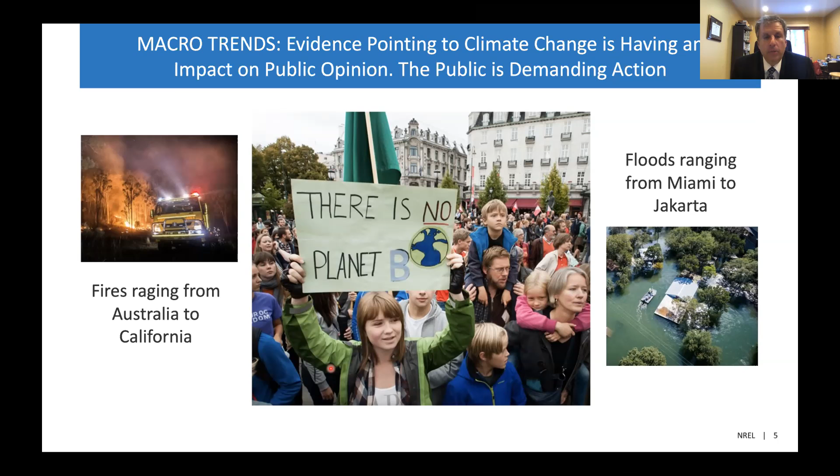More extreme weather events. As we all know, you can't tie a specific weather event to climate change. But what you can see is more extreme conditions, and we're clearly seeing the negative global impacts of that. So there really is an imperative to do something about climate change.

This one is kind of a more recent problem, if you will, but in a lot of ways, every bit as big of a problem. Single-use plastics are becoming the bane of society. The recycle rate is quite low. They're disposed of very casually. They end up in oceans, plastic tides, degrading pristine beach environments, ocean environments, mountain environments, you name it. So really, single-use plastics are becoming a very societal problem, both in the United States and globally. And it's really imperative of science and engineering to do something about that.

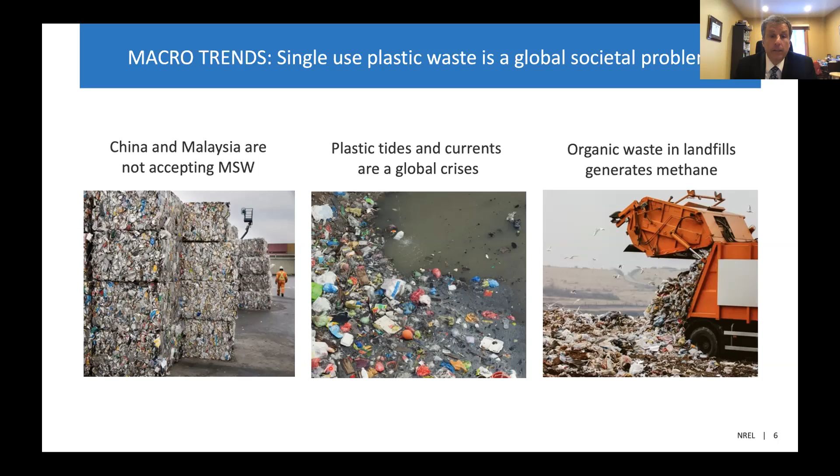And then finally, and in a lot of ways, most importantly, conventional internal combustion cars have major detrimental impacts on air quality. It's affecting the health of our population. Probably most importantly, it's affecting the health of our children. Air pollution, urban air pollution, is a significant issue. It's a global health issue. And there's a lot of contributors to air pollution, but vehicles, conventional vehicles, are a significant contributor to that.

So that's really kind of the situation that we are in. Society as a whole has really benefited from the extensive use of fossil fuels for electricity generation and fuel generation, but our commodity-based, low-priced energy with almost exclusive reliance on fossil fuels is having many detrimental impacts on human health, planet health, and it's really at the imperative of engineers and scientists to address that.

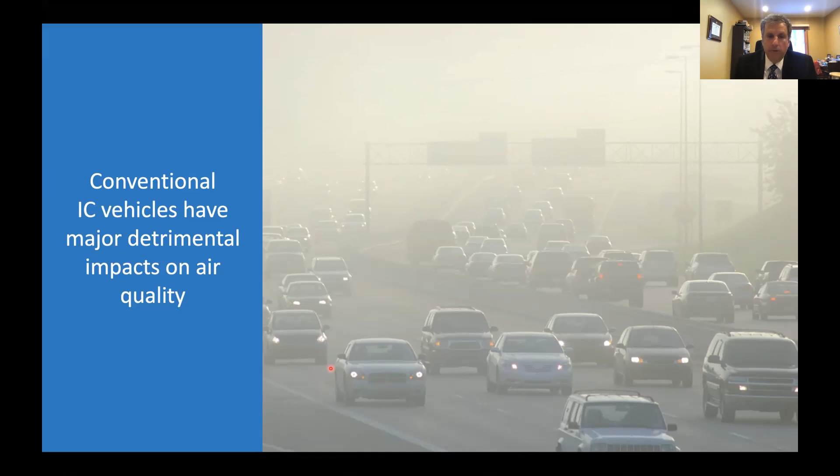So now I'm going to kind of switch gears. That was all kind of, I don't want to say doom and gloom, but that was really kind of highlighting the detriments of our current approach. So I really wanted to switch gears and focus on some positive developments. So I'm sure everybody in the call has heard about the promise. A lot of people are probably working in this field. The promise of low-cost batteries, high-capacity batteries, and how that can really enable a transition to battery electric vehicles.

Interestingly enough, a metric was set up probably in the early 2000s that once we achieved a battery cost of $100 per kilowatt hour, scientific wisdom, commercialization wisdom, is that would be when battery electric vehicles were truly competitive with internal combustion cars, gasoline powered cars, and they would have significant penetration of the marketplace to a point of being the majority of new vehicle sales. So you can see this chart in the middle really plots that, and you can see the dramatic reductions in 2010 to 2018.

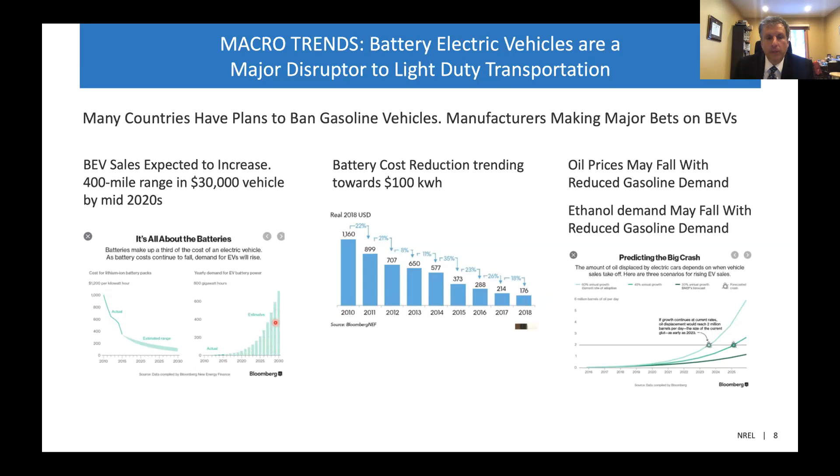The reason this chart stops at 2018 is that it was when the data stopped being reported publicly. Now individual companies like Tesla, General Motors, BMW, a lot of vehicle manufacturers now consider that a proprietary technology. So it's not peer-reviewed published what battery costs are, but a lot of true experts in the field feel that industry leaders like Tesla and General Motors already have crossed that $100 a kilowatt hour threshold for battery cost. And then as you can see from this chart, that's when it's really expected that electric vehicles will really start taking off into the marketplace.

So that's encouraging. I did get some data from, there's a lot of organizations out there that predict the future. As we all know, nobody has the ability to predict the future. It's impossible. But what you can do is look at trends, do various different assumptions. This chart here, in a lot of ways, to me, proves the obvious, since this is put out by the Energy Information Administration, a part of Department of Energy, so it's somewhat politically influenced in the fact that they take very conservative assumptions. And this shows the conservative nature of their assumptions.

What this slide projects is vehicle sales as a function of the range of the electric vehicle. So what they're showing is if the electric vehicles only have a 100-mile range, essentially sales are negligible. And then once you get to 200, 300 mile range vehicles, sales dramatically increase. Interestingly, it doesn't show much of a market for plug-in hybrids. A lot of people would argue, probably correctly, that this is overly conservative, as the vehicles commercially available are already over 200-mile ranges. Some are more than 300-mile range. So realistically, this chart would probably be more meaningful if it took it up to 400 or 500.

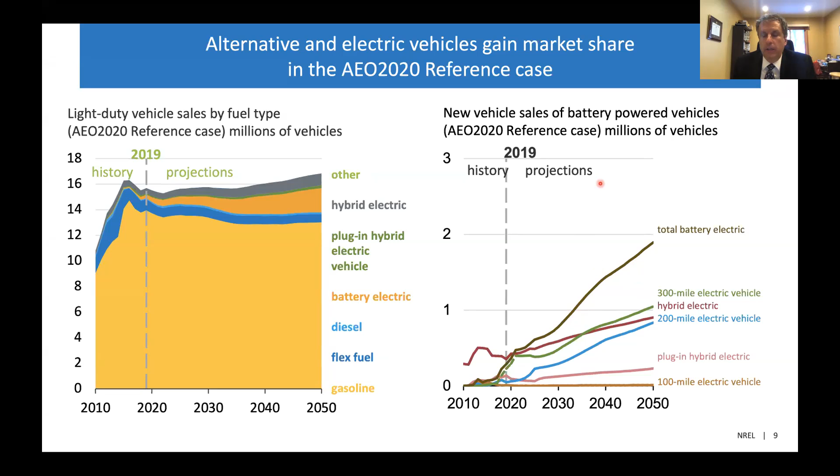But what you can see is that seems to be the driver for consumer acceptance. So once we get these higher range vehicles, you'll really see a dramatic increase in electric percent. This is all light duty vehicles, cars, light duty trucks. So that would really be the predominance of new vehicle sales. This is also very encouraging.

This shows the history of electricity prices in the United States and in various different scenarios. These are all extremely encouraging. And you see by the predominance of low cost wind and solar that electricity prices are going down. Like I mentioned, I would take the specific numbers with a grain of salt, but I think the overall trends are extremely encouraging. You see electricity prices going down, plus you see low carbon sustainable percentages taking over the mix of the electricity. So that's just very encouraging.

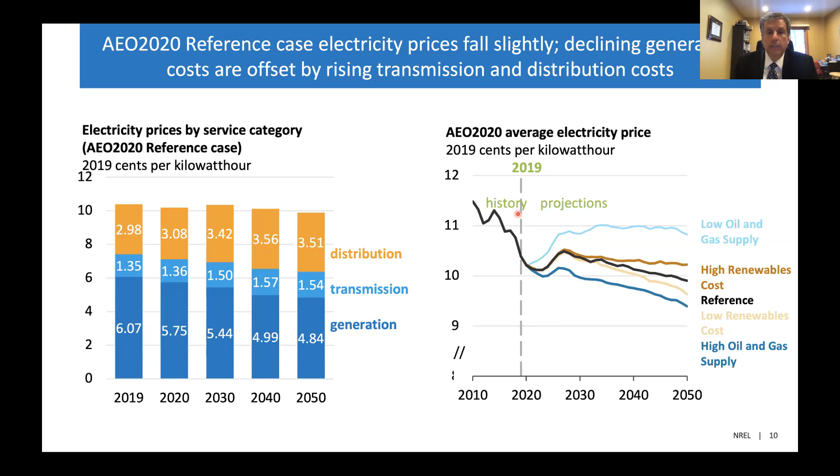First time really in, I can't think when, maybe in the 1960s, but even before that, that the long-term projections are electricity prices decreasing and also switching to more sustainable, lower polluting, lower greenhouse gas emitting. So that's very exciting. This just shows it for biofuels.

Again, biofuels have come down to the point that, maybe not now with the low crude oil prices due to COVID-19 restrictions and driving, but prior to the COVID reduced use of transportation fuels, biofuels are arguably competitive. And this isn't first generation biofuels. This is the more sustainable cellulosic, lignocellulosic biofuels.

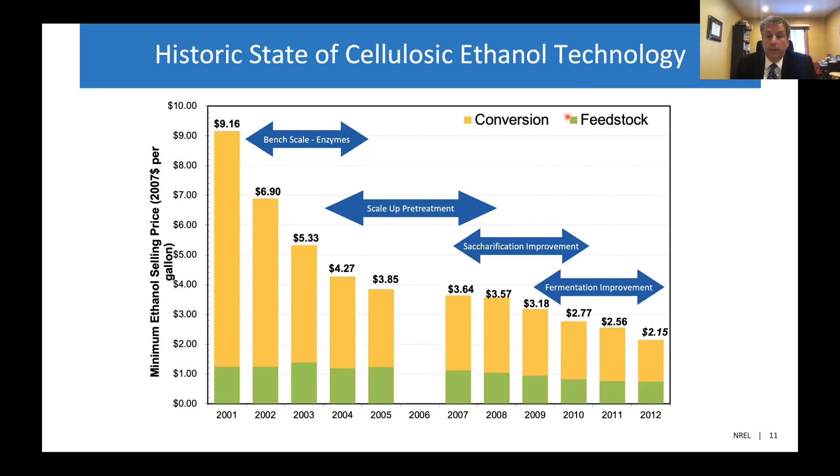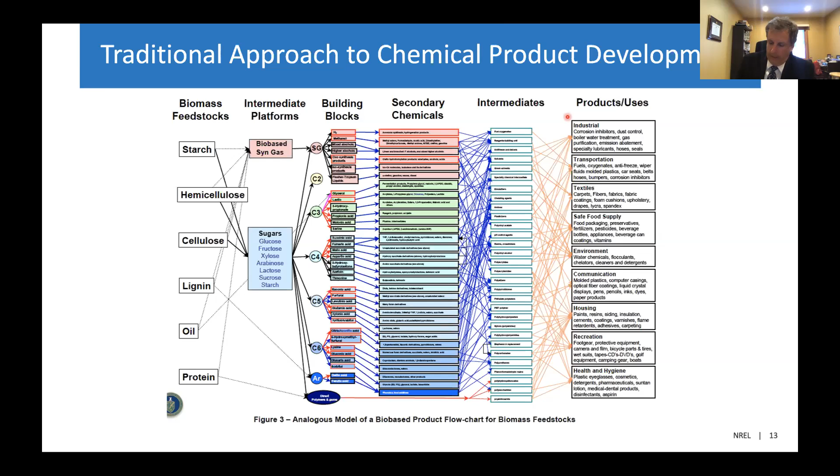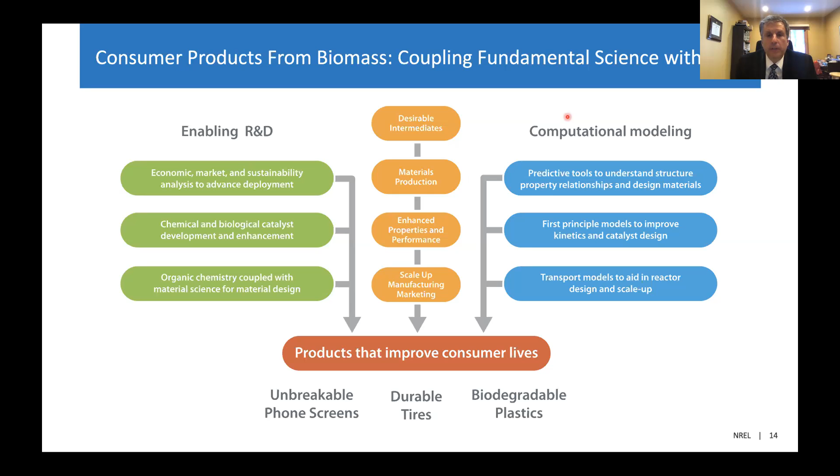So significant improvements in engineering modeling, biological modeling. As we all know, Jennifer Doudna and Emmanuelle Charpentier won a Nobel Prize for CRISPR-Cas9. And that's a biological technique to tie physical properties, phenotypes, to genotypes. Same thing in the chemical engineering space, where you can use atomistic scale modeling all the way up to continuum scale modeling to really specifically tie chemical structures to physical properties for chemicals, combustion properties, emission properties for fuels.

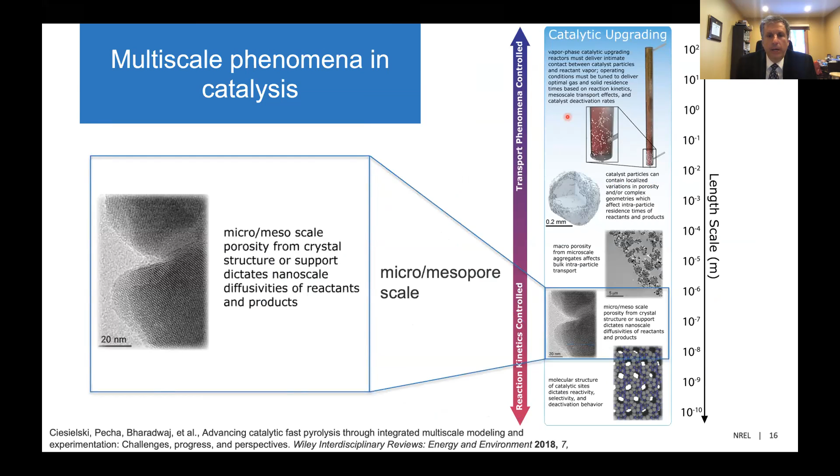This just shows kind of a very streamlined way of doing that, to use density functional theory, quantum mechanical type of approaches, all the way up through the various different scales till you get to chemical reactors or you get to industrial scales. So by doing this, you can really streamline the process for chemical design, fuel design. It's much more rational.

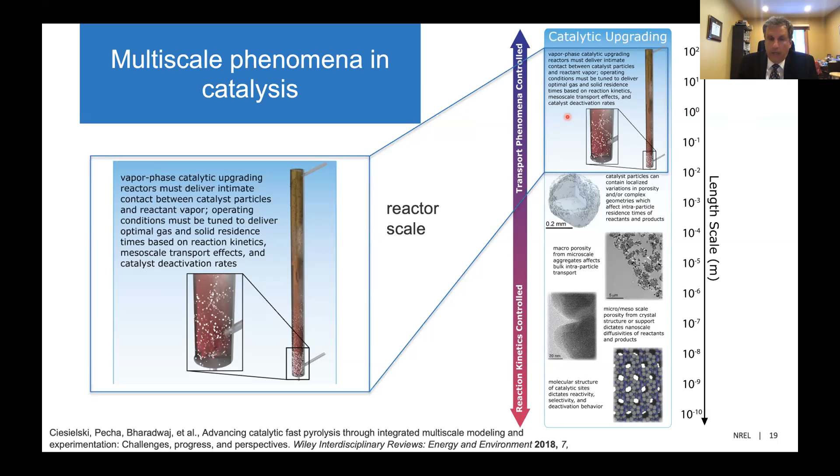And it's very positive, I think, for commercialization potential. These types of approaches can be turned around from new chemicals to products in a matter of years, where the traditional approach would take decades. So all of those are really coming together simultaneously. And that's giving us a lot of promise.

As we all know, humans fundamentally have a desire to improve our situation. And that's a good thing. You know, when we remodel a house, we tend to make it nicer. We buy new clothes, we tend to buy nicer clothes. It's just inherently part of human nature. So as you see me go through this presentation, that's the point that I'm trying to make.

I think human psychology, the human desire to improve our situation, has to be a fundamental part of this, as well as improving human health, global health through air pollution, waste disposal, climate change. But if we can do those simultaneously with improving the human condition, I think we'll get a wide scale acceptance, and it would really be something that would drive government investment, commercial sector investment, and really has the opportunity to improve the situation for everybody.

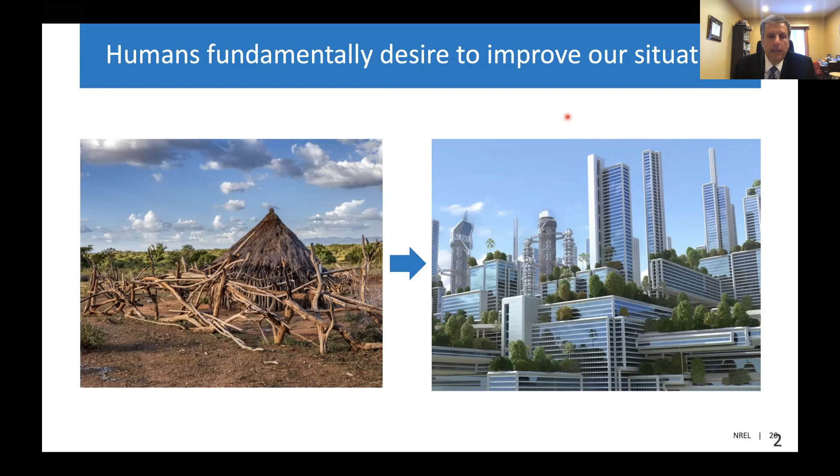I think most people, even in the mid-90s, would argue that a Ford Taurus was not perceived as an advancement, wasn't perceived as an improvement on the current vehicle situation. So there really wasn't a market imperative to purchase and drive a first generation biofuel vehicle. It was just perceived as more of the same.

And then this is what I think Elon Musk deserves a lot of credit for. When Tesla introduced the first generation Tesla Model S, which was the 2012, marketing the human desire to improve was a dramatic part of that. And people perceived electric vehicles as an improvement over current cars. It's a nice looking vehicle. It performs well. Interestingly enough, 8 years later, it ages well.

So Elon Musk and Tesla got it right, and the biofuels community really didn't. And that carries over to this day, whereas biofuel vehicle sales are a small declining segment of vehicle sales, whereas electric vehicles are just dramatically increasing.

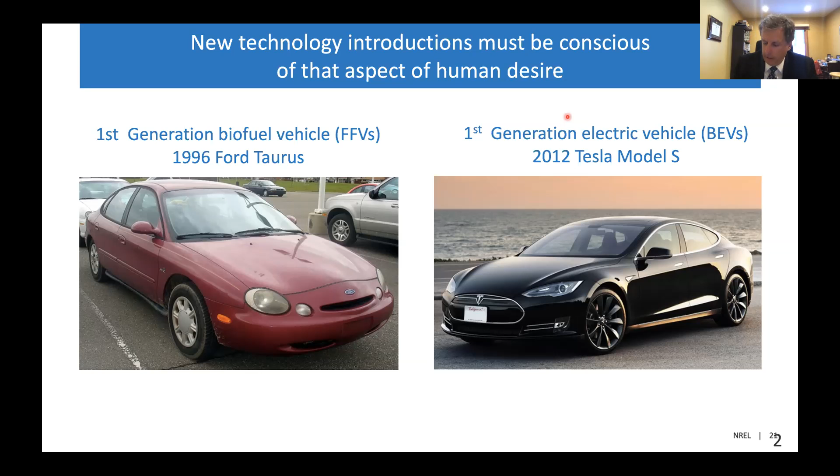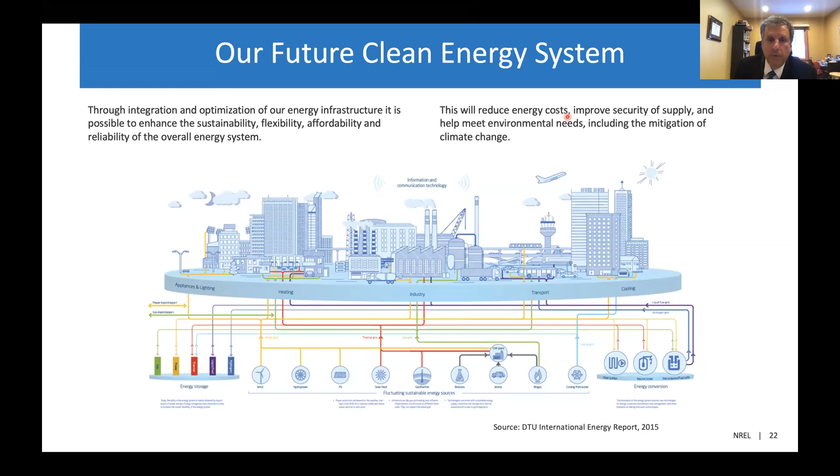more sustainable context. So my argument, NREL's argument, is we should really look at sustainability and low carbon energy as central to energy planning. That really should be what the future energy mix is based around, because that really is what provides us the opportunity to move energy, product space, chemical space to more sustainability.

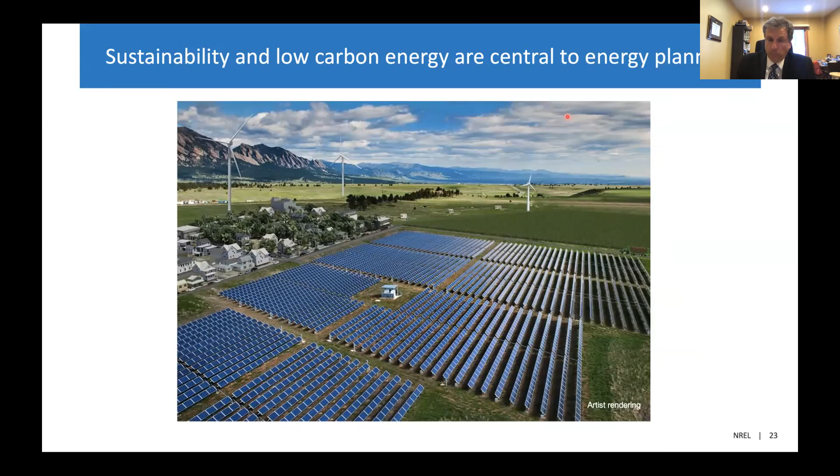So how do you do that? That's really what I'm going to walk through now. And I'm going to talk about three specific approaches for doing that: integrated energy pathways, electrons to molecules, and then finally circular economy. So let's talk about integrated pathways.

So today's grids were built arguably 100 years ago. They were mostly built around large coal-based plants, then nuclear plants, oil plants, but large fossil-based plants, hundreds of megawatts, if not gigawatts, that control the frequency on the grid. And that's really how the AC grid generation system in this country is developed.

As we go forward, especially if we incorporate a significant portion of renewable energy, one thing I will say is there's a lot of comments made about renewable energy's intermittent nature. Obviously solar only generates electricity when the sun is shining, and wind only does it when the wind is blowing, and so those are intermittent, and that's a significant issue in today's grid, and that absolutely is true. But we're never going to get the sun to shine 24 hours a day or the wind to blow 24 hours a day. So we really have to accommodate for the intermittent nature.

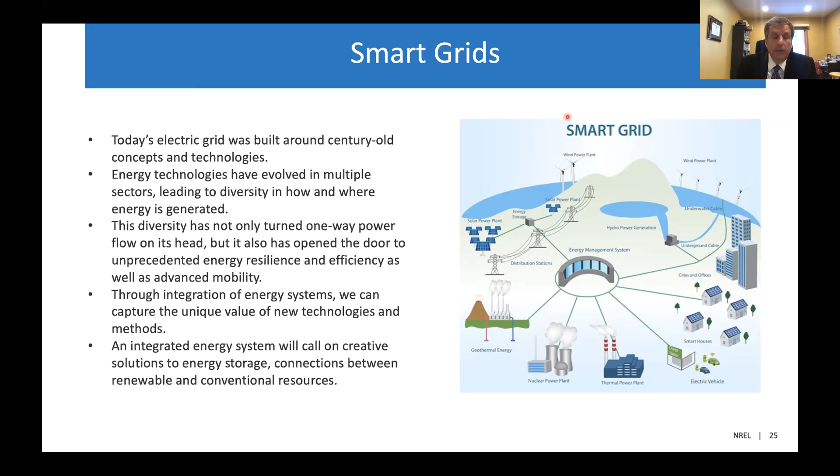And these smart grid approaches, by looking at two-way power, by looking at ways you can store power without having large battery installments, all these really open up a lot of ways to overcome the intermittent nature of renewable energy and not have to supplant that with complete fossil backup. So smart grids are really microgrids. Some people will refer to these as microgrids, but they're really two different terminologies for saying the grids of the future.

One thing I did want to touch upon, electric vehicles. Electric vehicles are exciting in a lot of ways, but one way that people might not historically think of is the life expectancy of electric vehicles. Induction motors, I've seen a number of papers on this, if you extrapolate their life to electric vehicles, you can easily come up with a scenario that electric vehicles last 1 million miles or longer, where for internal combustion cars, 250, 300,000 miles are really the top end of their life expectancy.

So if you only look at electric vehicles as a one-for-one replacement of the POV, personally owned vehicle, you're really missing some of the true potential of these electric vehicles. I must clarify that one of the fundamental assumptions on this is we get battery technology to last that 1 million miles. But the technology, that's not a pipe dream.

The technology development of battery technologies is clearly positively trending in that direction. Current batteries probably no, but hopefully the batteries of 5 to 10 years in the future are capable of that.

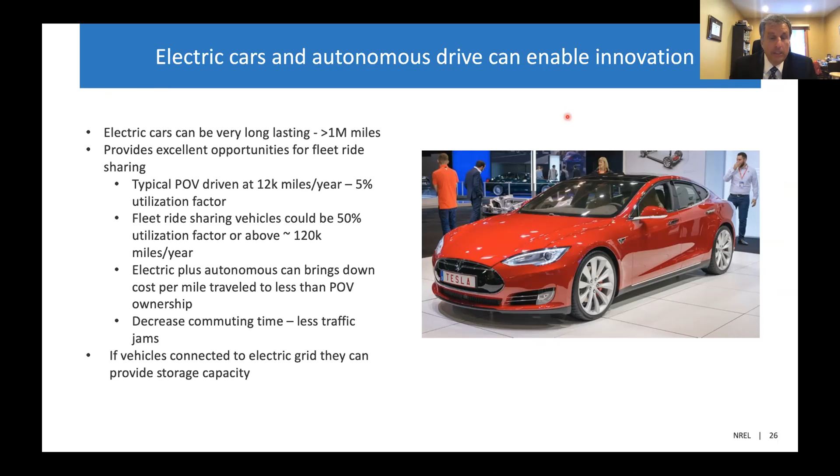And additionally, since they're fleet vehicles: you've heard about the intermittent nature of solar, something referred to as the duck curve. The peak solar generation is from 10 to 2, but the peak use is when people go home, non-COVID, and use electricity from about 5 o'clock to 8 o'clock. So these fleet vehicles could be plugged into the grid. They could provide the storage capacity, get lower cost of electricity by doing that, and alleviate the utilities having to buy their own batteries for storage. So really significant out of the box opportunities with electric vehicles.

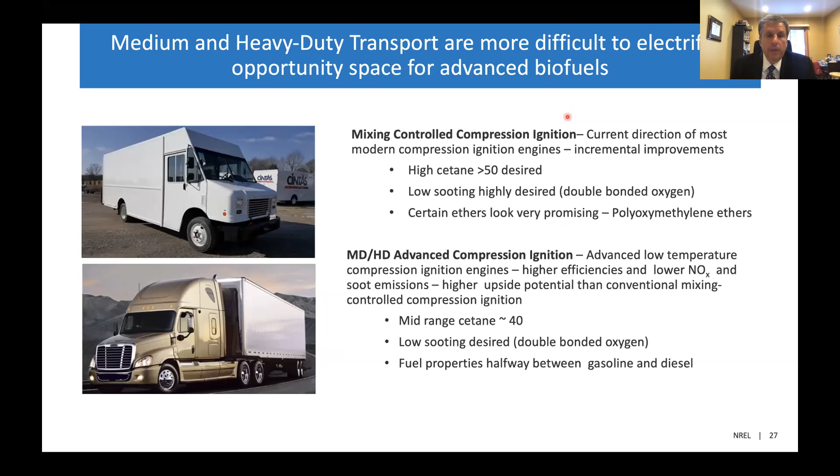That's light duty. Mid duty and heavy duty are harder to electrify. So here's where advanced biofuels come in. By using carbon oxygen bonds, you can reduce soot emissions. You can improve cetane. You can look at lower temperature combustion, gasoline compression ignition. Biofuels can open up some space in these vehicles that are harder to electrify. Eventually these vehicles might be electrified, but the pathway to accomplishing that is much longer term than light duty.

Heavy duty highway trucks: maybe advanced biofuels, or maybe hydrogen fuel cells, or maybe even wireless electric charging on the interstates. All sorts of opportunities looking at all the various different transportation modes.

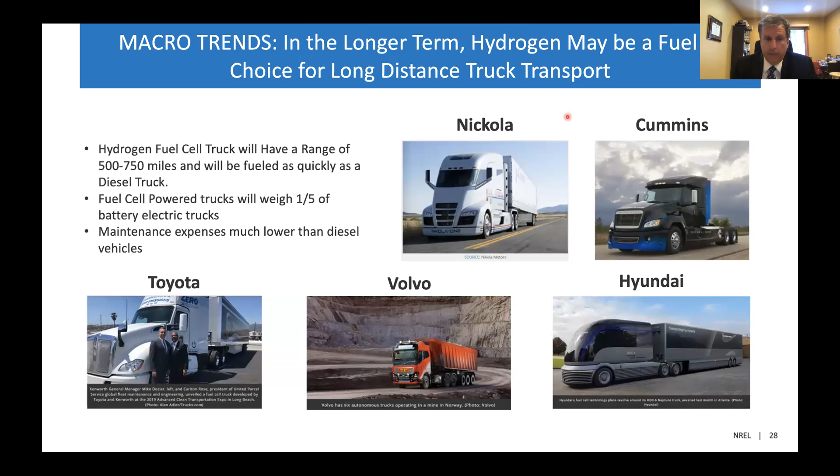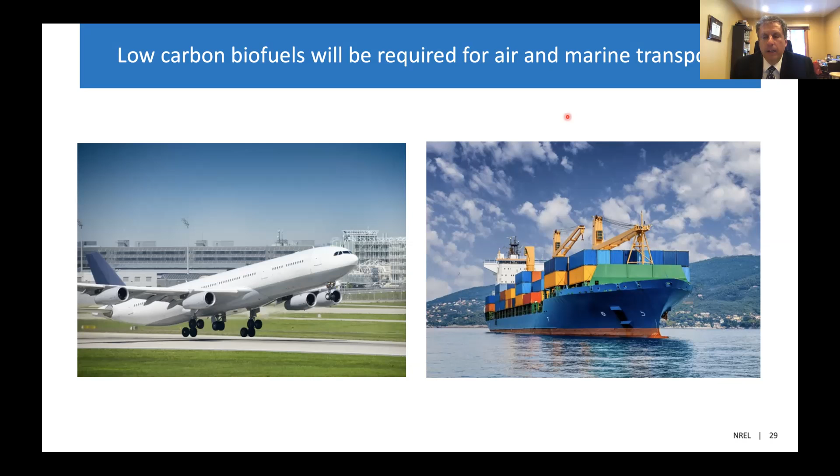Jets and marine: maybe in the midterm to long term, short haul planes could be electrified, but in the near term there's a need for jet fuel. Biofuels have a lot of potential here, low carbon jet fuels, advanced jet fuels, same thing with marine. It's hard to envision ocean transport vessels being electrified. So biofuels could have a nice potential to reduce the carbon and environmental footprint. That really shows what we could do with integrated pathways. A lot of opportunity space.

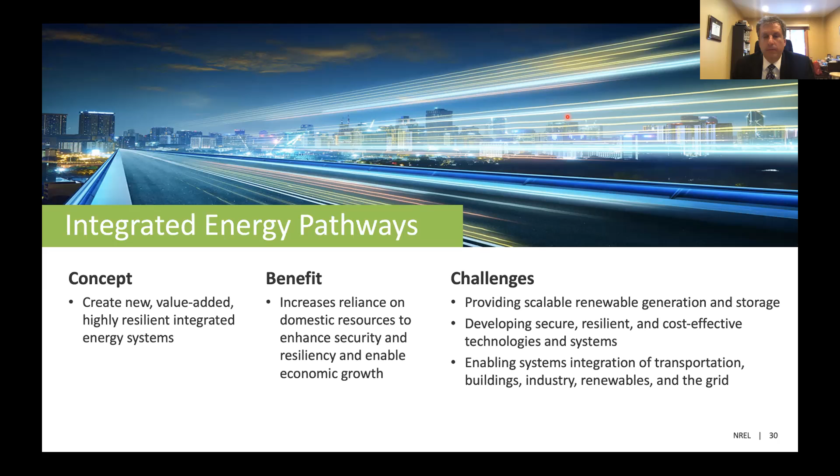Are these technologies completely economically competitive with existing technologies? In most cases not. Some cases they are, like battery electric vehicles in light duty. A lot of improvements are needed in battery technology, smart grids, and research in storage integration. But the upside is huge: sustainable societies, sustainable cities, lower greenhouse gas, lower urban congestion, lower emissions, better air quality. So really significant upsides.

Let me switch now to the industry space. Process industries are almost exclusively based on fossil feedstocks, large economies of scale. Electricity has historically been a high cost input. Most existing fuels and chemical plants are 24/7 operation, very large scale. If you offered them intermittent wind and solar electricity, it's just not something their process can accommodate.

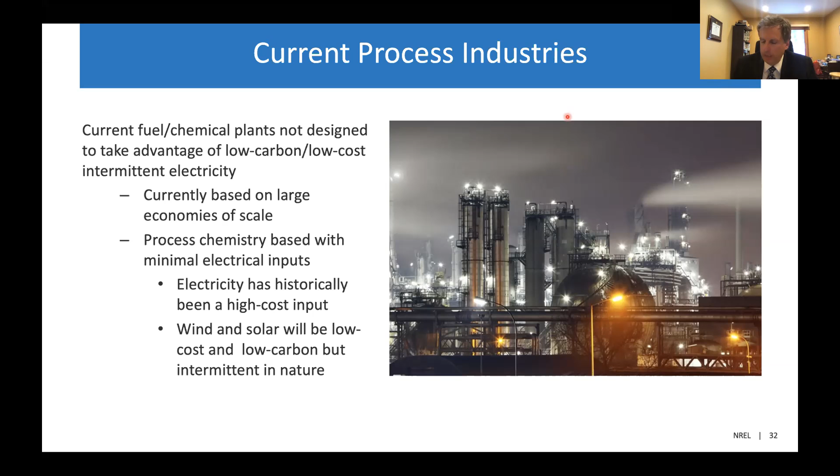So if you switch to a process using electrochemical reduction of CO2, water splitting, and the latest in biocatalysis and electrocatalysis, there are industrial situations where you can make polymers, materials, chemicals, and fuels where your only inputs are CO2, water, and renewable electricity. So the opportunity space to transform process industry to sustainable energy is huge. It's fair to say these are currently not economically competitive with current fossil fuel approaches.

But with R&D, it's really the first time in human history that we've had low carbon, no carbon electricity. If you were using traditional coal-based electricity or even natural gas, you're actually generating more CO2 than you're sequestering. So there's no point to it. But now you could actually be sequestering carbon in industrial products.

The other advantage of this, which is really exciting, is kind of similar to cell phones, where the developing world never really had the telephone infrastructure, the electric infrastructure that the developed world had. But as far as communications, they leapfrogged all that by going to cell phones and really didn't need to run telephone lines. Same type of thing. A lot of the developing world doesn't have electric power distribution, doesn't have extensive transportation networks.

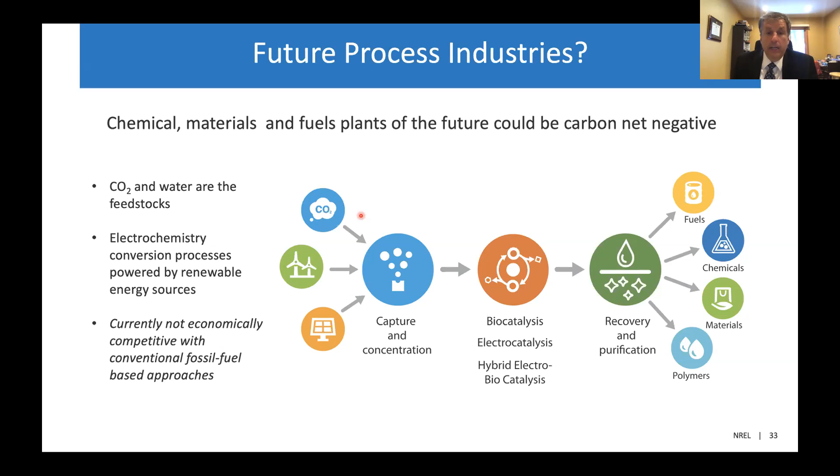But by doing these small distributed conversion plants, where your only inputs are solar cells, CO2, and water, you could even look at distilling CO2 out of the atmosphere. You could really look at leapfrogging these developing countries into industrial space, economic revitalization, better human condition without the need for all that infrastructure. So that's really exciting, both in the developing world and the developed world.

Like I mentioned, especially in the developed world, this is not cost competitive, not even close, maybe a few high value niche market products. But to get this down to cost competitiveness, significant R&D, technology development, engineering development is required.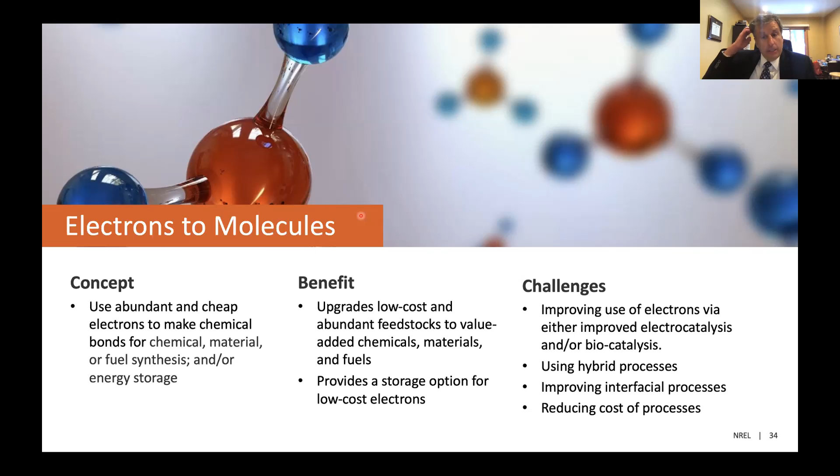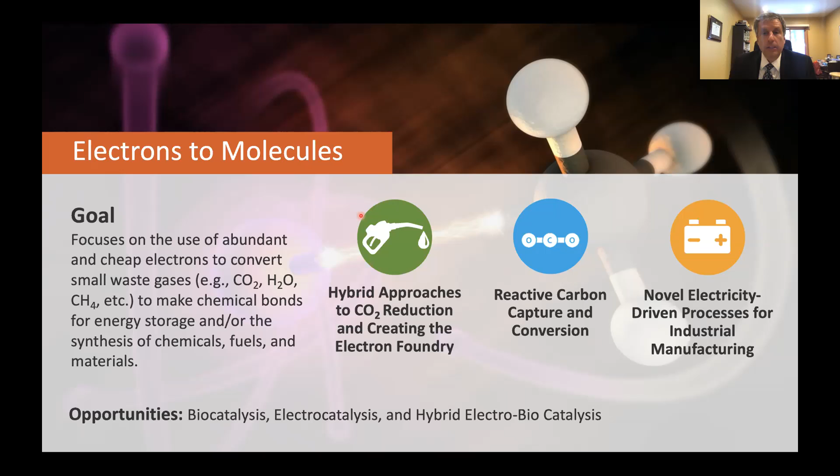Biocatalysis, electrocatalysis, hybrid processes, a lot of advanced engineering, carbon capture, CO2 reduction, really some exciting opportunities in the chemical engineering, mechanical engineering, and electrical engineering space to transform industry to this more sustainable model. And like I said, the opportunities in the developing world, where they could leapfrog into these types of industrial processes without the infrastructure, are very exciting.

Finally, let me finish with challenges with plastic recycle. The number one problem with plastic recycle, I could have just written this bullet, is as simple as that: it's not economic. Current processes are not economic. Virgin plastics are cheaper and better. And until we solve that, we can put bans on single-use plastics, and we can look at, which I think we should, less water bottle use and all that kind of stuff.

I think it's good. But the reality is, when you drive across the countryside, why don't you see rusted cars sitting all over the place? Well, because it's economically attractive to recycle cars. Why don't you see wood waste or tires sitting all over the place? Same thing, because it's economically attractive to recycle them. And that's really, I think, what could transform this huge problem.

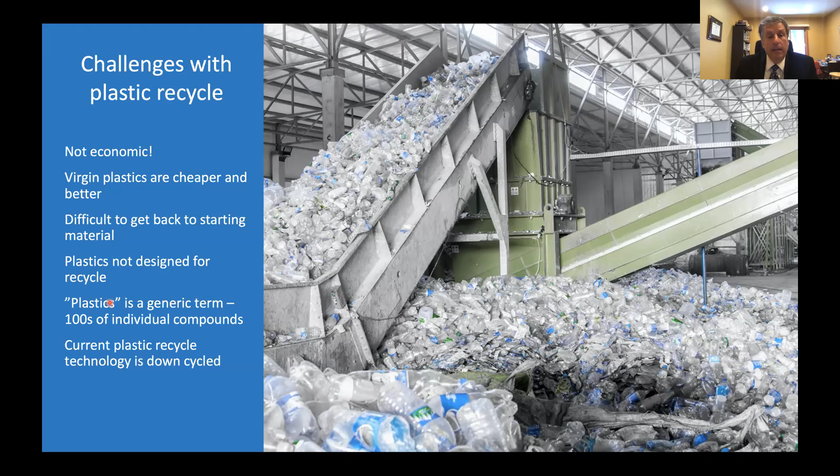If we could come up with the technologies to get recycled plastics at least to the place of metal recycle or wood recycle, where it's at least as good, if not, in metal's case, actually better, then this whole huge problem would go away. And that is a huge challenge. But luckily, we have a lot of good work and a lot of good people that are already looking at it.

You can open up an opportunity space in plastics where you make plastics inherently biodegradable, or even better, you can upcycle plastics. In this particular case, you can take a polyethylene terephthalate monomer, use biomass amine-based chemistry, and upgrade it to a Kevlar material, something that has almost 100x the value. I don't want to over exaggerate and say these are commercial technologies. These are chemical transformations in the lab and have a long way to go to commercial viability.

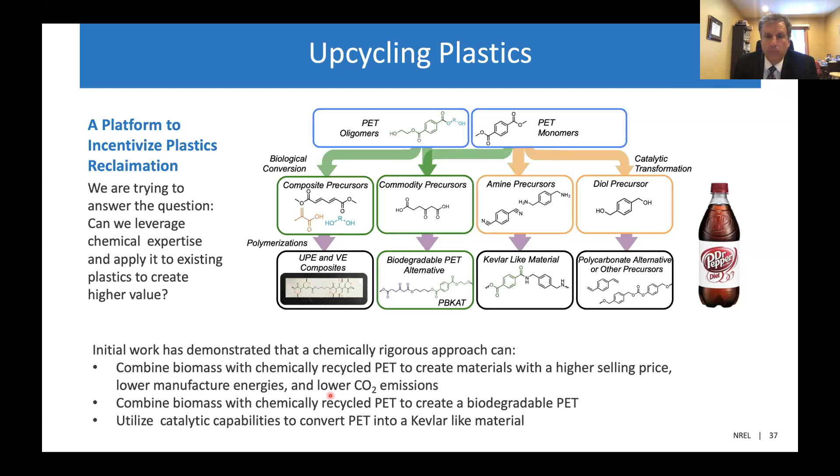Like I said, the big challenge is poor economics. Plastic recycling is just not economic for a multitude of reasons. That would be a whole presentation in and of itself to explain all those reasons, so I glossed over them here.

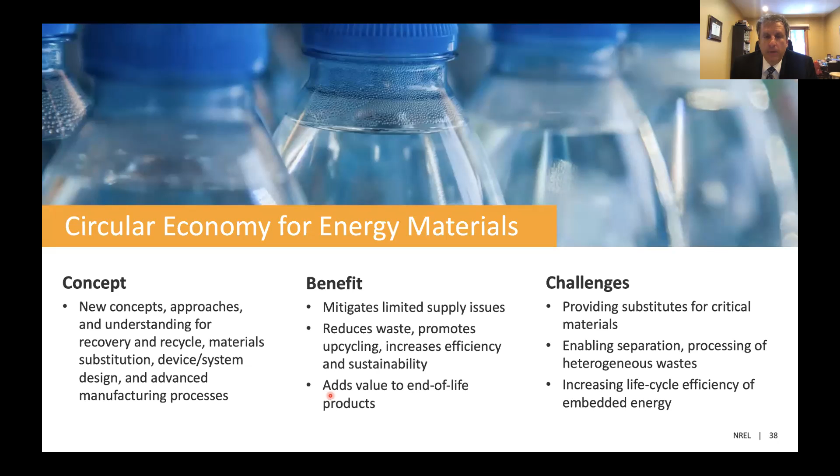But the challenge is really how to do that, how to get the chemistry, how to get the engineering processes to really be able to do that. And then this just shows the research to be able to do this. But this opportunity space is very good. I think creatively, collectively as a society with the engineering expertise, the chemical expertise, the infrastructure expertise, we have the ability to do this. So this is really something humanity should be focusing on.